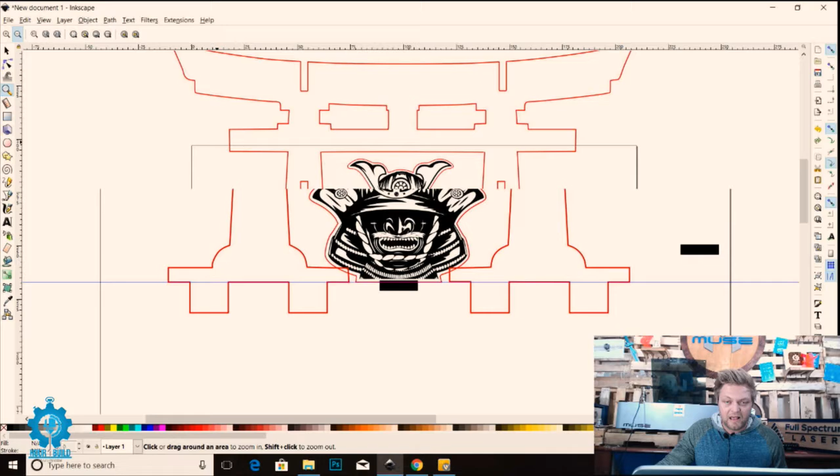If you stay tuned, I'm going to teach you a little bit about how to speak Japanese. I took Japanese in college, and I'll teach you how to make a real quick friend by speaking Japanese, and it'll only take one sentence.

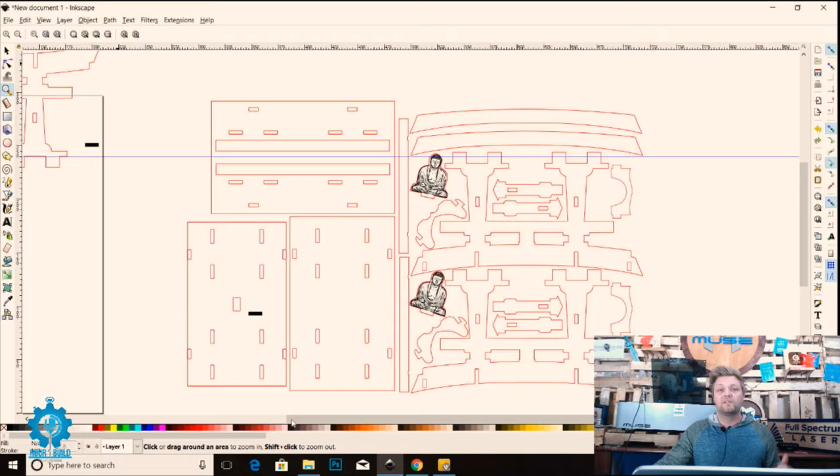That's besides the point. So here's the file. This will fit inside your hobby laser, a single piece of wood that will fit in your hobby laser, and it's about 17 minutes to run, so not too long. It's made for the Rowmark 3mm material wood, but you can cut this out of any 3mm that you have laying around, acrylic, anything 3mm. So feel free to make this project out of acrylic, wood, anything that you have.

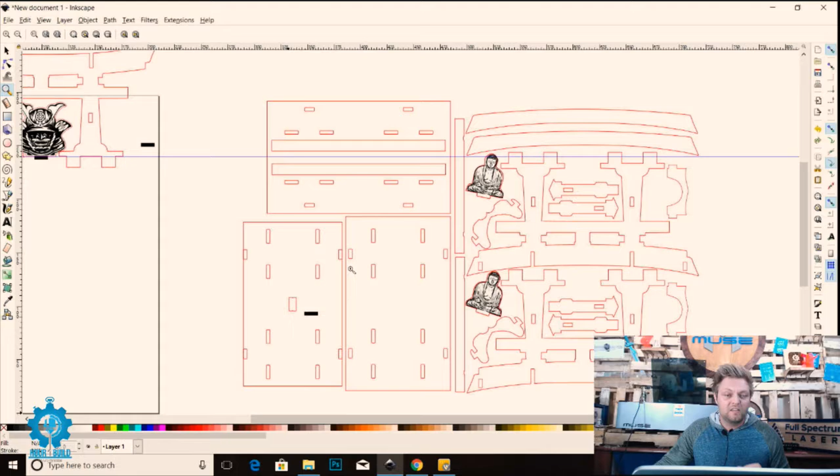So that's the weekly contest. Let's get back to the software. This is the top platform, and I'm going to show you how to change out this sitting Buddha for anything that you want.

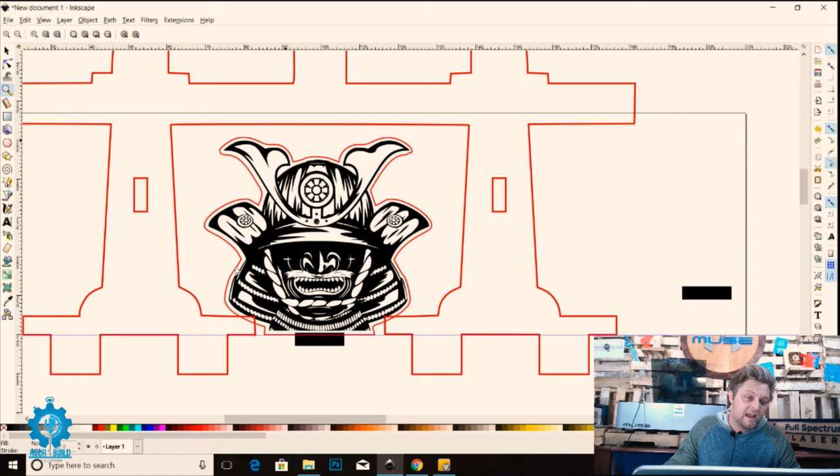So I'm going to actually do this Kabuto. Let's say you don't like that little Buddha in the middle, even though it's super cool, and you want to switch it up and make it this Kabuto. You can do so, and I'll show you how. This is an auto trace from Google, very straightforward. And then we have this surrounding area, and that's just going to give us a nice border to cut out and still have our image. We don't want it tight to the raster just because that's the way I like the way that looks.

And then this is our notch. Our notch without any strokes is going to be the exact dimension of that notch itself, so that is 3.377 by 12.79. That is what you're going to start off with, and you're just going to merge that with your outline vector.

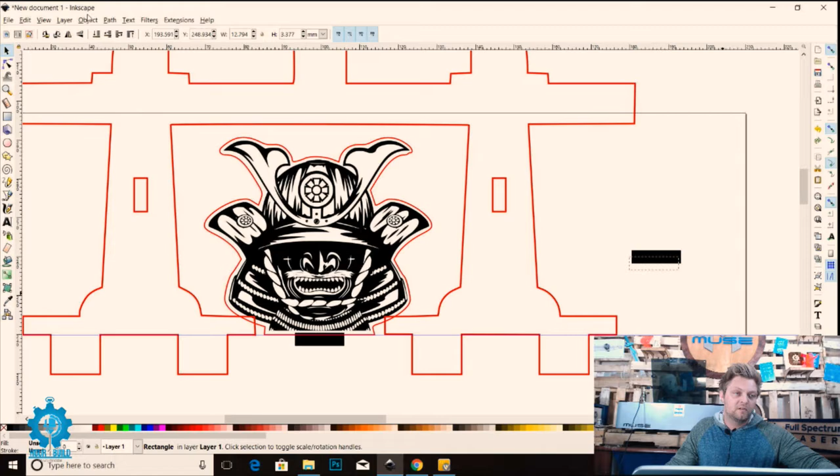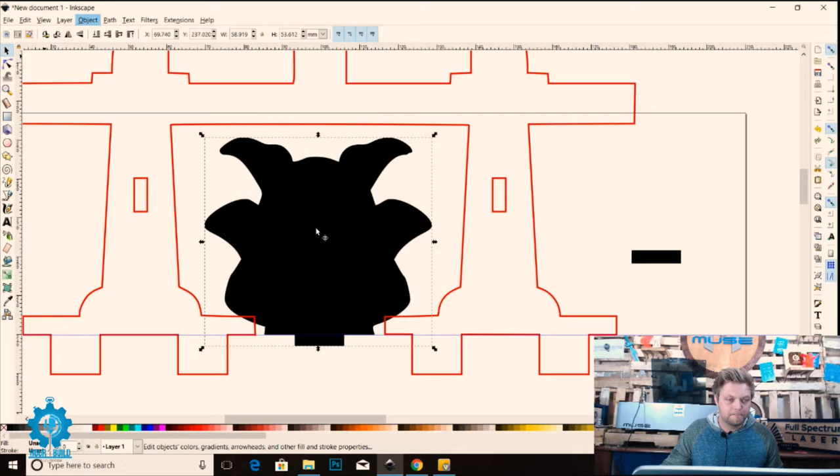And we'll just union those together, and we'll go to Object, fill and stroke. We're going to remove that fill and then make the stroke red just like the other cuts. As soon as it pops up here, the internet's a little slow in this room, bear with me.

There we go. So we're going to give a fill of nothing, and stroke, we'll make it red just like the cuts. And I use this back piece for proportion, I want to make sure that it's going to be the right size and look that I want sitting inside of this design.

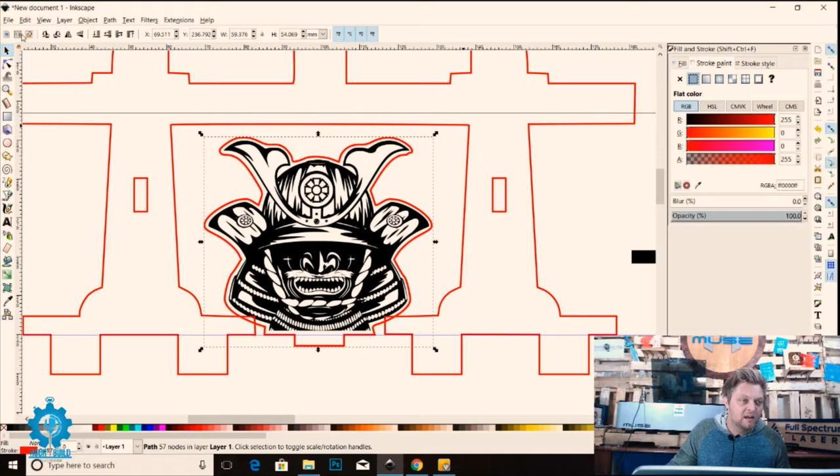Now this Japanese gate design is called a torii, and it represents many different things for their religions and culture. I just wanted to make a cool sword stand, because when you look online there's very basic stuff. You'll see a lot of plastic stuff, some wood stuff, but they're very basic, and I thought this would be kind of cool and dynamic and actually representative of the culture itself. So that's why I did it.

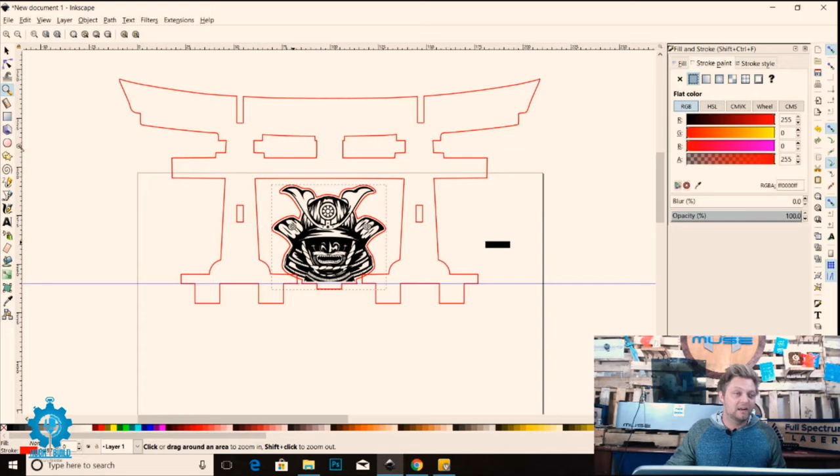So we have that guy there. What we're going to do is duplicate him, because I made this so it can go both ways. This actual piece doesn't matter if it's either way, so we double notched it, and then you just sit those guys back to back. So that's our file.

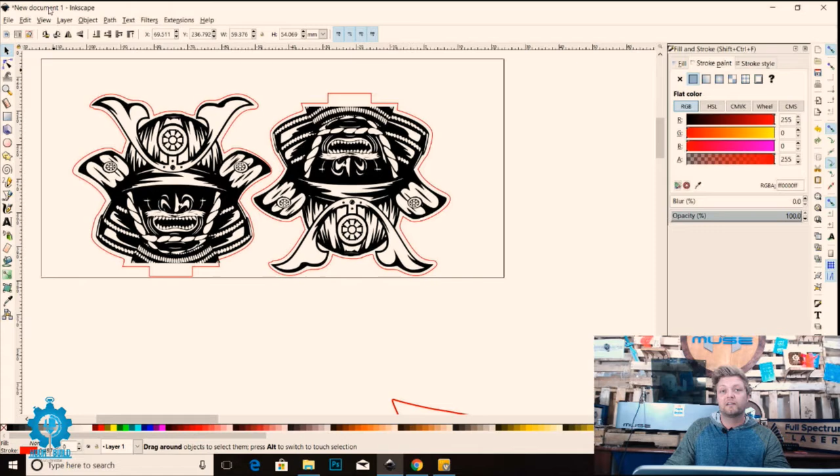I'm good to go, I'll just save this file, which I already saved. You know how to save it, so I won't show you. But we will go ahead, and well, there's the free project right there. If you don't know where it is, there it is. And you'll see all of our weekly projects down there as well.

How am I doing, Charles? Doing good? Woo!

Alright, so I already made this PDF. I'm just going to drag and drop it in. I called it Kabuto.

I'm going to import everything because I want to raster, engrave, and cut this. So I'm going to open everything.

Then I'm going to show you how to take a picture with your Muse and why it's useful. I went to Maker Faire last weekend, and some customers asked me to go through that process, so here we go.

We have both our raster and vector. The machine's already focused to our material, so I'm just going to capture the workspace.

Oh, the camera fell down. There we go. I'll hold it in place.

You'll see the software upload it slowly, one by one, taking 9 images and then stitching them together as the machine takes them. That's the simple process of taking the picture.

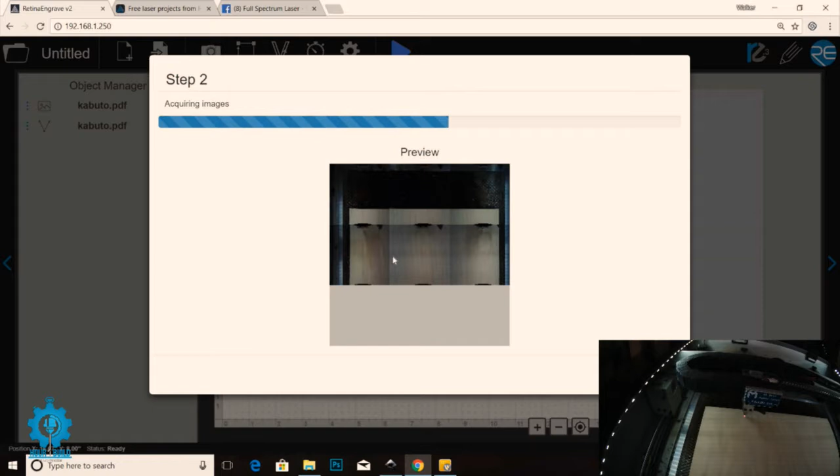So we can drag our design on top, and there we go. We don't have to look at the machine anymore.

Now we have the picture of our piece of wood inside the machine. You can see the honeycomb on the back and the piece of wood. I'm just going to drag my file and put it right on top of this piece of wood.

And that's exactly where it is and exactly where it will be. I don't want to waste any of this wood material, so I'm going to keep it in the upper left-hand corner so I have most of the rest of the material to work with.

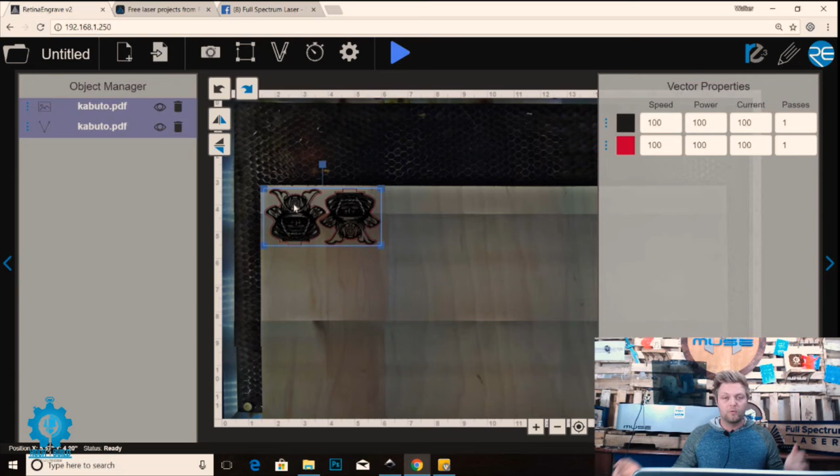I'm going to go to my vectors, and I don't want to do any of this black. So if we zoom in here, I just want to raster the black. I'm going to go to my vectors and turn the black off to 0 passes.

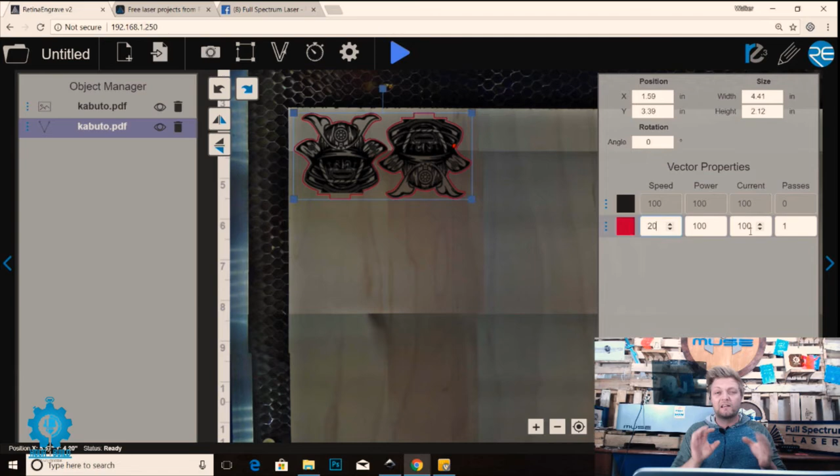The red is going to be my actual outline cut. I know the Muse will cut this material at 20 speed, 100 power. I could dial in the current a bit, but it cuts fine at 100 current, so I'll leave it at that.

Then I'm going to go to my raster settings. I really did want to cover this. We'll keep it at 250 DPI, just a nice, fast, clean raster. Honestly, it's a black fill, so we don't need to get fancy and step up the DPI unless we want it real deep and dark.

And we don't, so we'll keep it at that. I'll keep it at 100 power, and I'll slow the speed down to probably 60. That's 100 power, 60 speed, which will give me a nice dark raster without having to up the DPI.

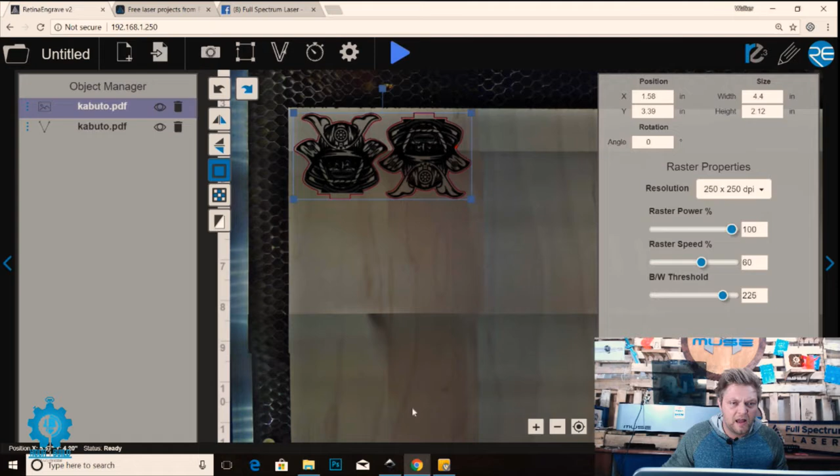Now black and white threshold is something I want to point out. Let's learn something about it. We'll zoom in here, and you'll see that the black and white threshold, if I hit play right now, this red outline will actually register as a raster, and I don't want that.

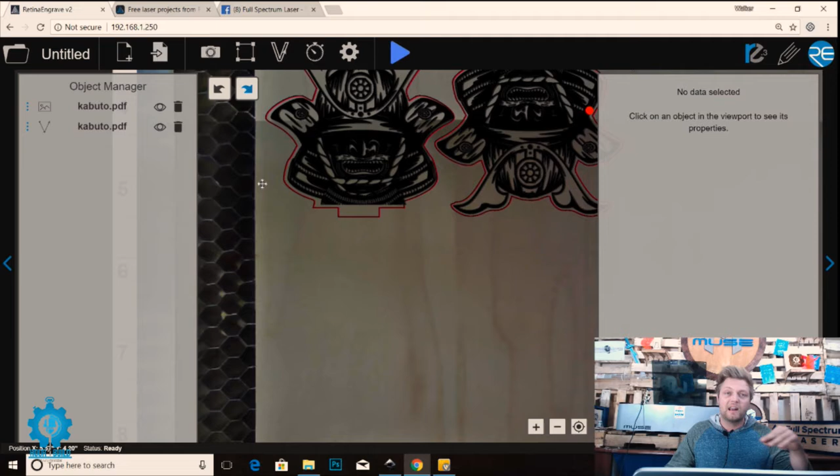I don't want to waste the time, even if it's just a little bit, rastering this away and then cutting it. So watch this area as I play with the actual black and white threshold.

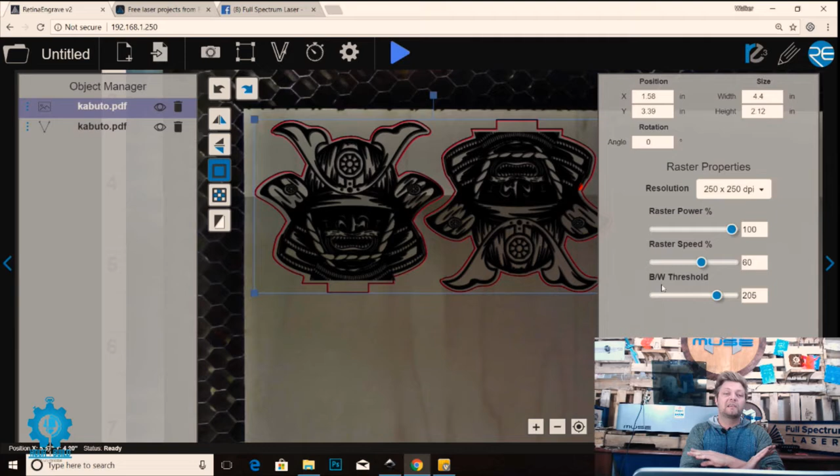I'm going to slide this and just watch that area as it changes. You'll see that it registers less and less. I'll do that until it registers nothing at all on that red. Now, that will never change if your vector lines are black.

So if you want to cut and raster at the same time, do not make your vector lines black unless you want to raster them. Sometimes you can design cleverly and use vector lines to make rasters, and that's fine.

But if you want to cut and raster at the same time and it's not part of your design, simply change that vector color to something red or lighter, sometimes yellow or cyan, anything like that.

I like red because I can see it well, but yellow is fine too. I can't see it too well, so I just keep it at red and play with this black and white threshold.

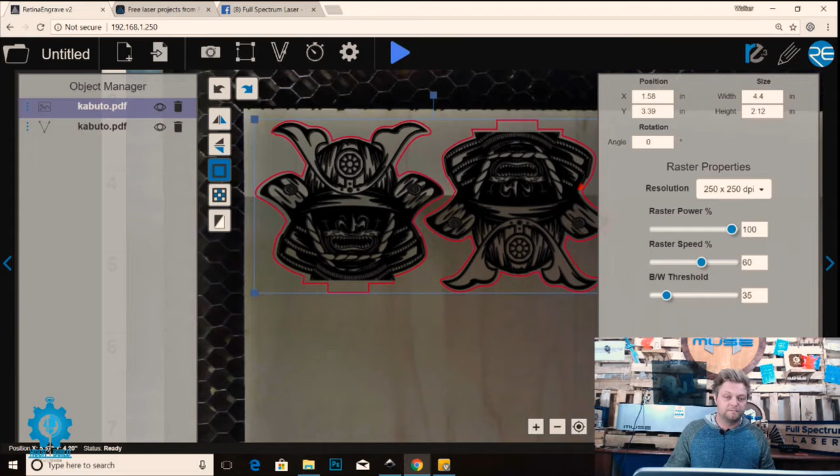Now I'm just going to run my perimeter and go to the machine, and we'll double check that it's in the area we want. So it's exactly where we want it.

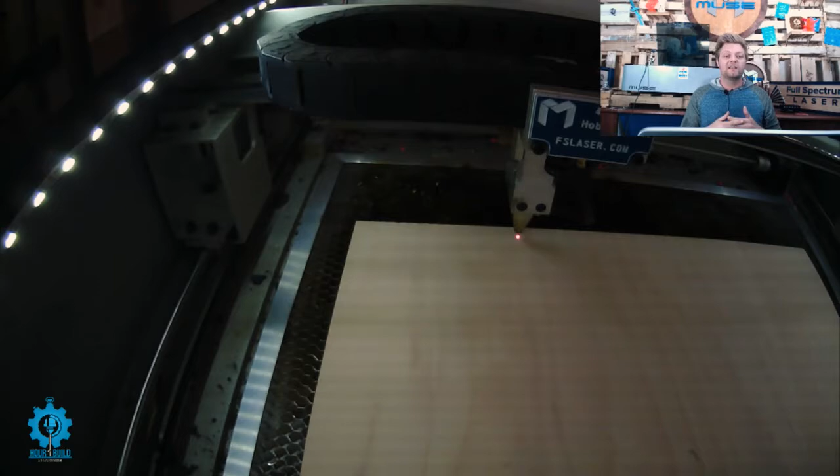We took the picture and it's one for one exactly the same inside the machine. It will run that perimeter over and over until you're ready to start the job, so I'm going to stop the perimeter and then hit play.

Now this job's about 6 minutes, so I have to fill 6 minutes of talking right now. No, just kidding, we're just going to watch it.

What are you guys doing on Memorial Weekend? We want to know. I'm going to double check if there's any comments. I don't see any comments. I hope you guys have a good weekend.

What was that, Charles? Huh?

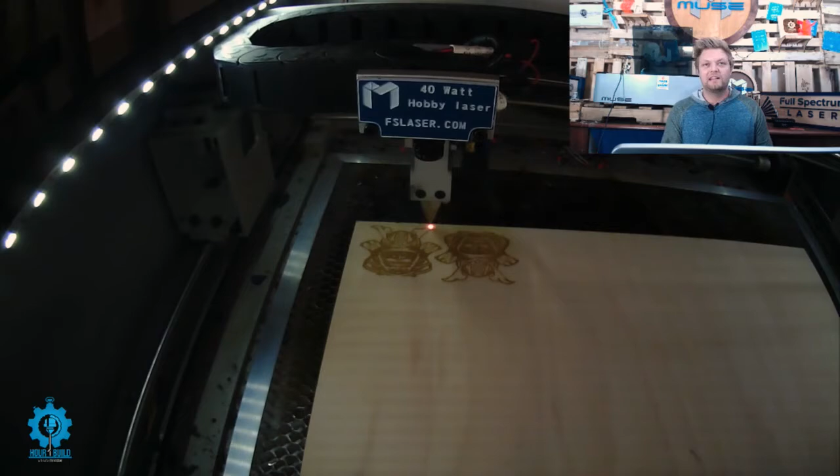But the engraving itself is coming to an end. Let's zoom in on that, Charles. There we go. Now we're about to cut. Again, 20 speed, 100 power, 100 current. We could play with the current if we wanted to, but it's cutting out fine.

What we're gonna do is just replace this little Buddha in here, the man of enlightenment, take him out, and then just replace it with our new design.